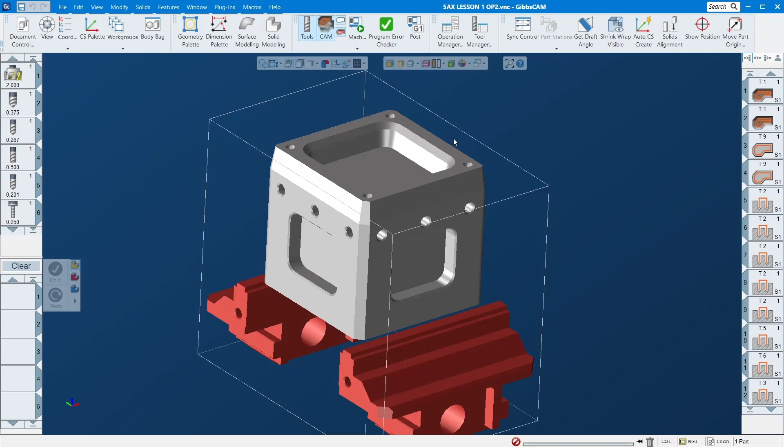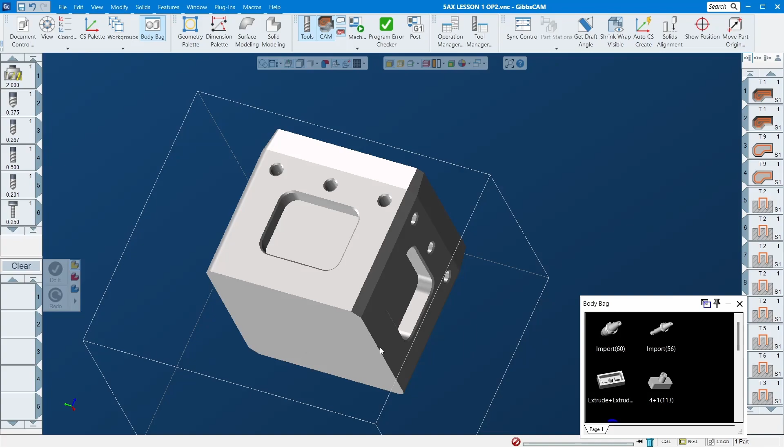I will show you how to align the model with the fixture with the vise so you can see how it's done. This is kind of tall for this vise, but I think it will be fine because it's just a three axis. The bottom doesn't really have anything here, so all we do is align it to the vise, then cut off whatever material we have left, and then chamfer it, and that should be done for this part.

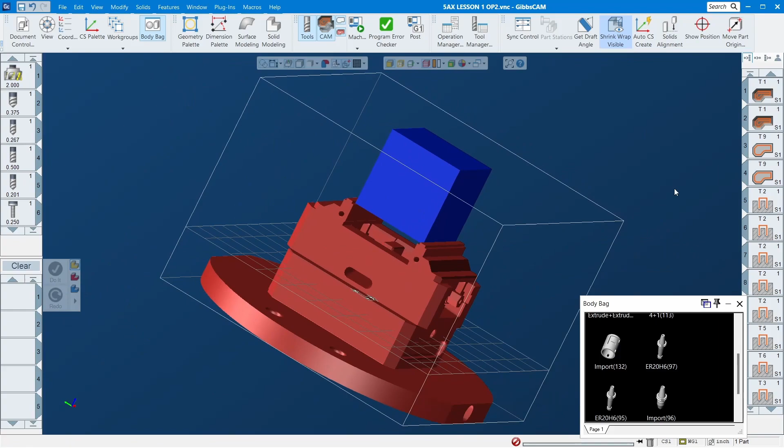So let's see here, take out the vise. Okay, let me turn this one to part. Okay, that's the vise, that's the stock, right? So everything here is from the first op.

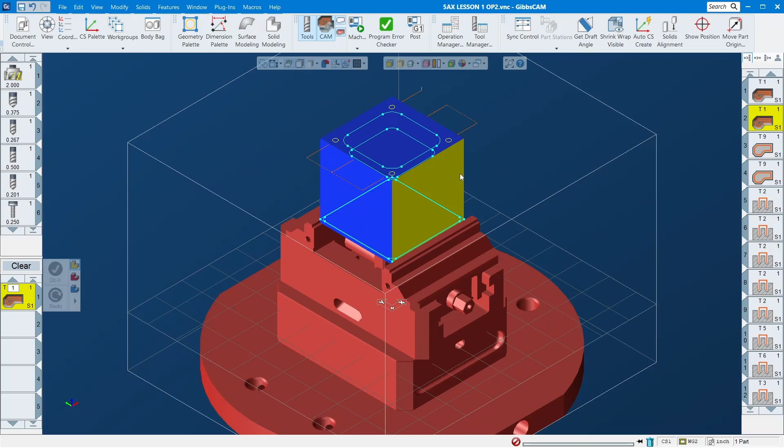Let me check and see how much we did last time. We removed material last time, so 90 thou, right? We know this is 4 by 4 by 4. And the part, how deep is the part? Okay, so 3.74, I think that's what I got. So 4 inches, we remove 90 thou already, and the part is 3.74, so about 250, and we remove 90, so what we have left is 0.16.

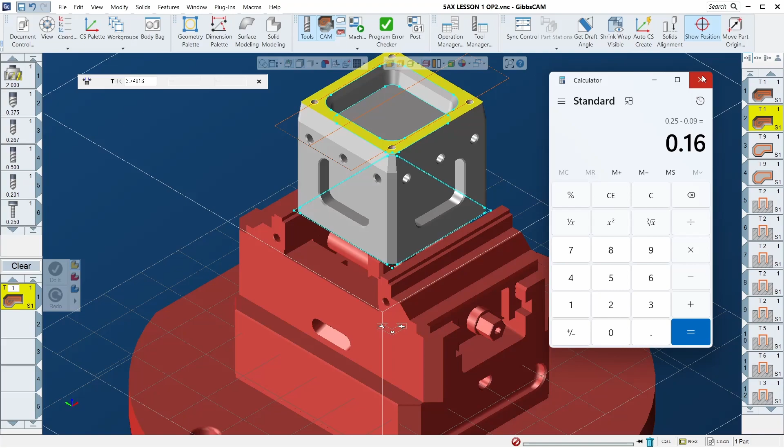Okay, since this one will be just a three axis, I'm going to delete all toolpaths here, and then we can redo all of these. Also, I want to clean up my program, so usually I delete all of this work group and CS.

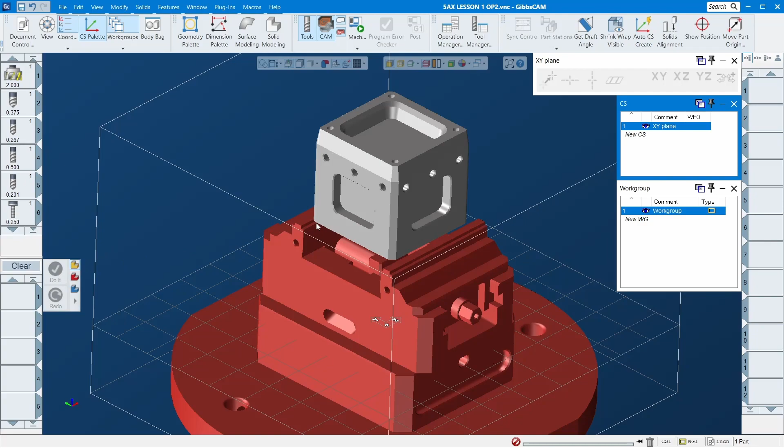Okay, I have to delete one. Okay, just like that, because all we do is just three axis, we just need to align this model upside down, so it's facing the bottom up. So that's where it should be.

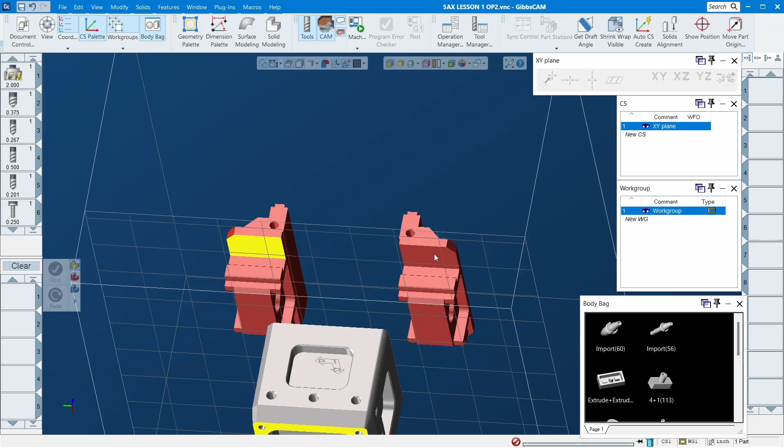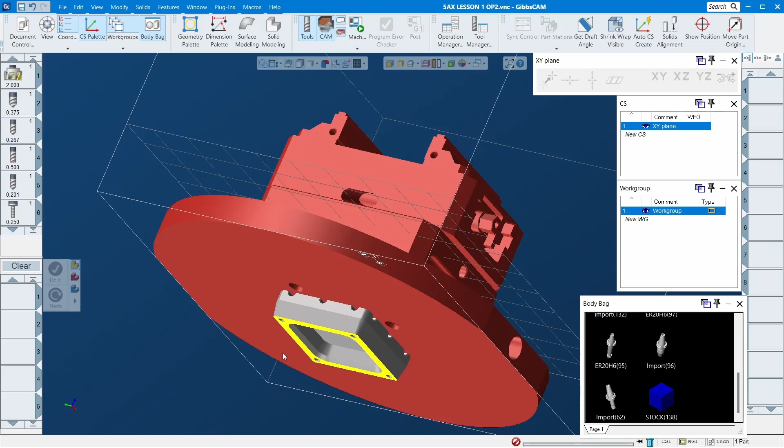Alright, since you have this one set up like this, all you need to do is highlight that surface, align to CS, and then align this to the vise. This is the vise, I'll show you. So, okay, this one's better. You want to line up your part face with this, right? So all you need to do is click the bottom face, highlight the bottom face, control and highlight that face, and then Solids Alignment.

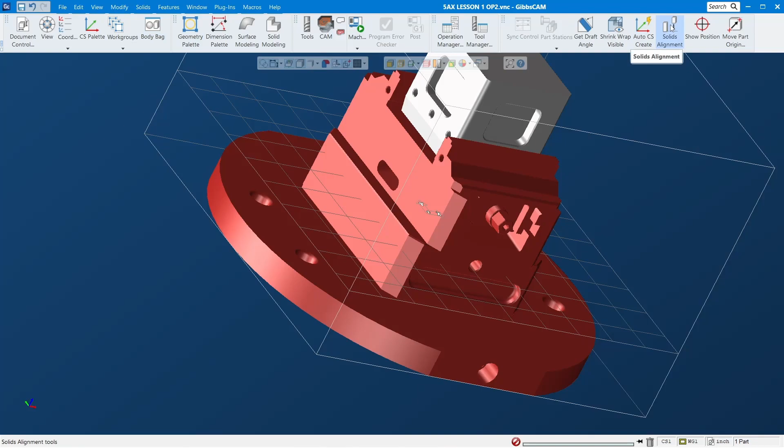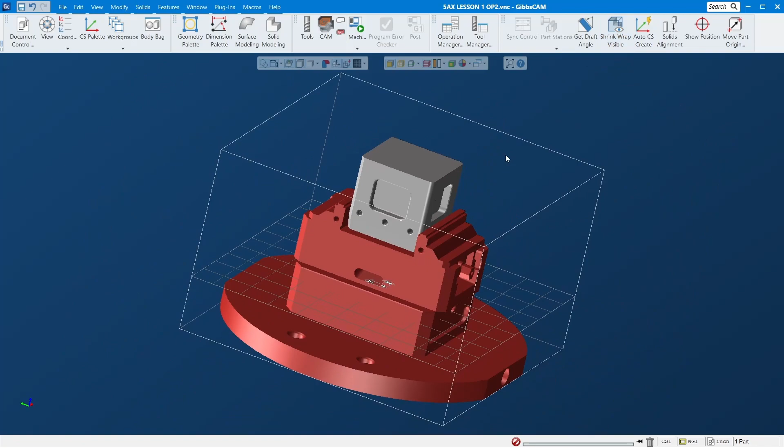That's it, so we don't need this stock anymore. Okay, and clean those up. As you can see, it will sit like this. Okay, so it's going to go in here a little bit, so we're going to fix it by aligning it again. That, and this. There you go.

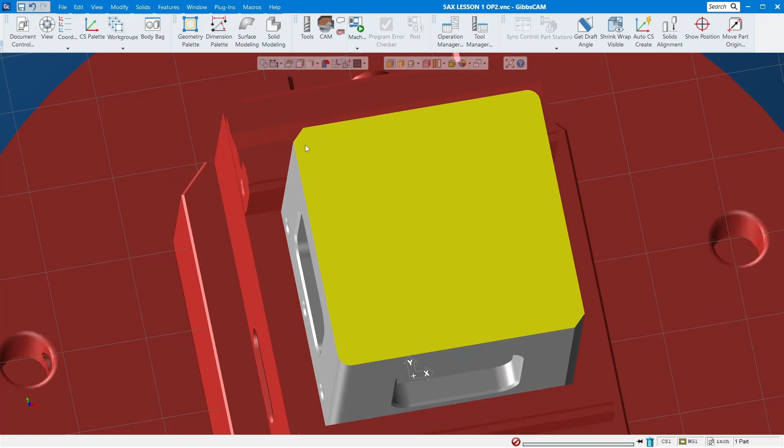So now it will stay with whatever you want, right? Just make sure that when you put it in the vise, since this one has a radius and this one a chamfer, make sure you align it correctly, otherwise it will mess this one up. So pay attention to that. Next one is just extract the geometry, right, and ready to make the program.

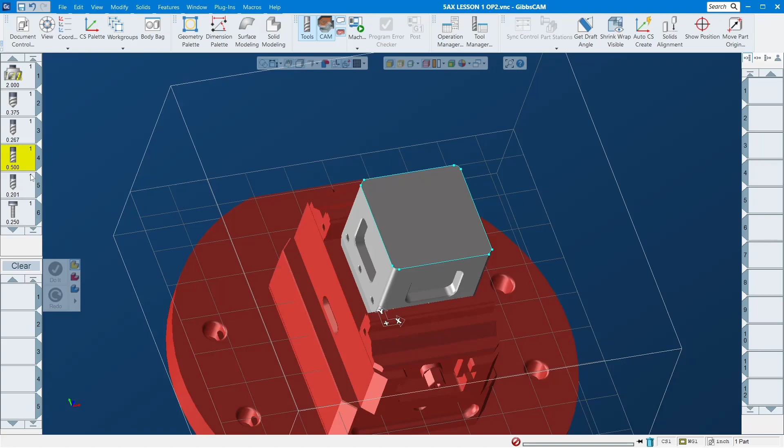So we can use a half inch here. As you can see, when you flip this one over, the material will be sticking out around here a little bit, about 160, right?

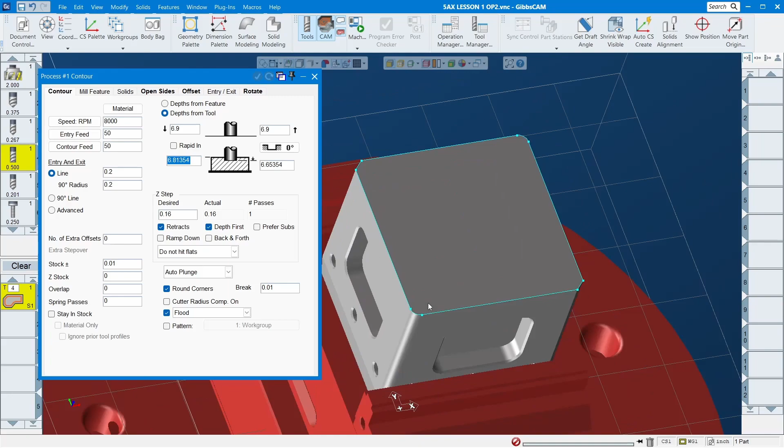Okay, so 160. So what I usually do before I face up is just do a contour pass to cut the stock out here, so when you face, it doesn't make chatter sound. Or sometimes when you have a big material hanging out too much, I think it's a good idea to just clean up around it before you face the side. That's what I do, so it depends on what you want to do. Sometimes it's not necessary, but sometimes it does make sense to cut around it, and that's usually what I do.

Now you have this number, which is 6.9. Yeah, I think it's good. Now go to the 0. Oh, I just want one.

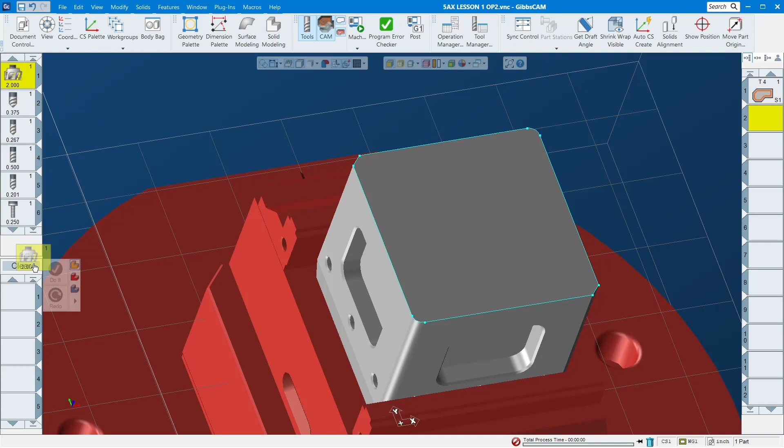And now move the face down. Face mill, I think we do 70. Okay, leave some for finish. Everything else should stay the same. We don't want all the way down, so I don't know, 60 thou, something like that.

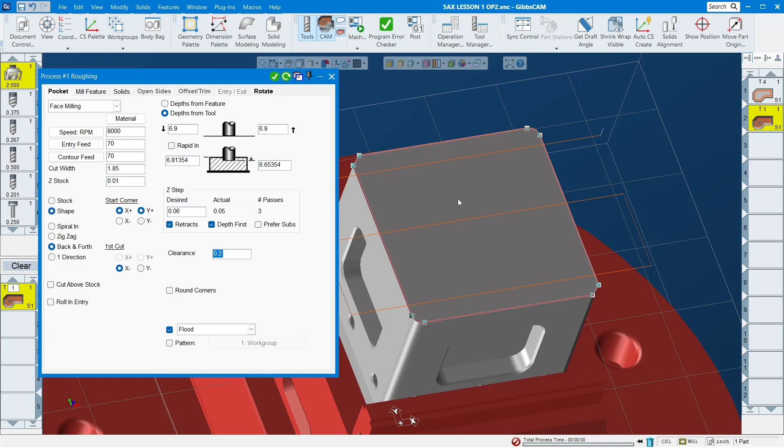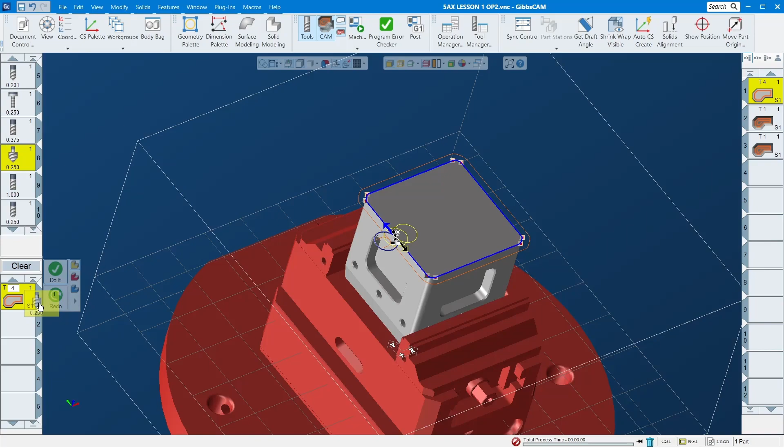Okay, so check this actually. There you go. And then the next one, the finish pass, you can check that. Of course, this is one pass for finish, right? And this one will be the chamfer, because we want to do a chamfer around, so it looks nice.

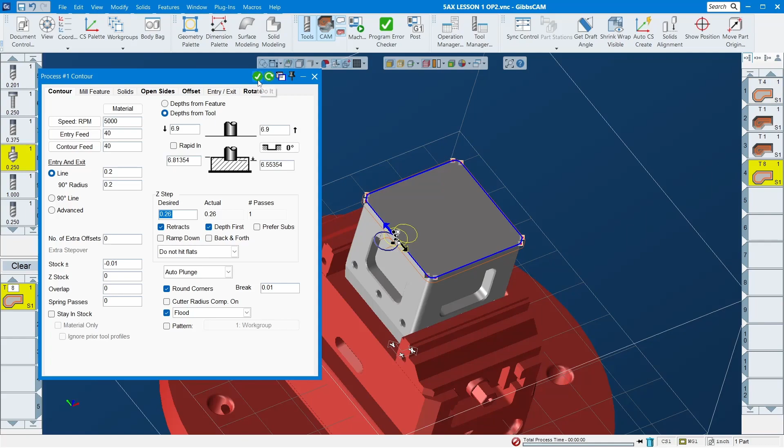Chamfer, maybe slow it down a little bit. -10. And about 0.1 down. Do it. Okay, so we need to turn this to stock to display so we can see it.

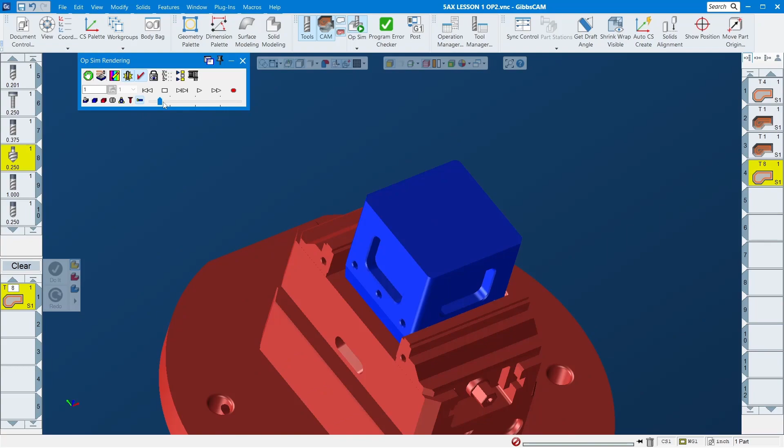Now we don't need the machine sim anymore because it's just 3 axis, everything should be clear. Alright, so let's do slow so you can see. Let's cut out the face mill.

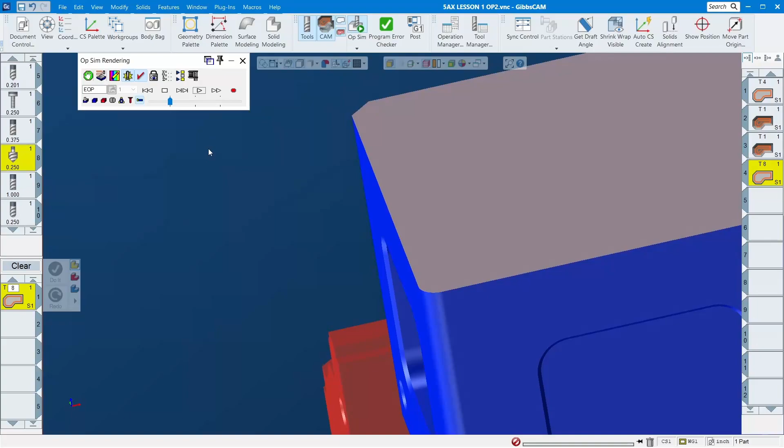I don't see the face mill button. Why is that? The chamfer doesn't cut, so kind of weird.

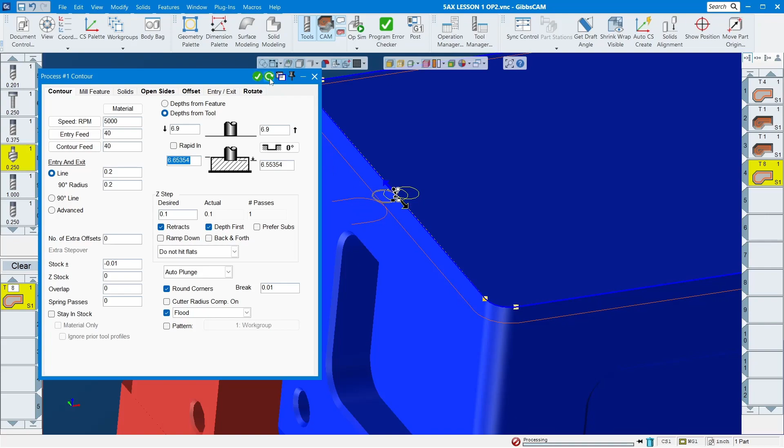-10. Yeah, should be. Oh, okay. This one should be down there because you already cut to the side, right?

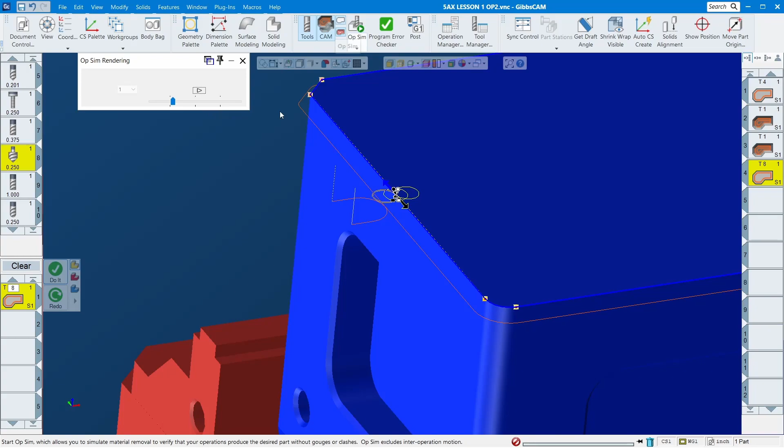Which is the number previously I have 6.8 something. That's where the top of the stock is, so that's why it doesn't cut. But this time it should cut. You should be able to see the chamfer pass now.

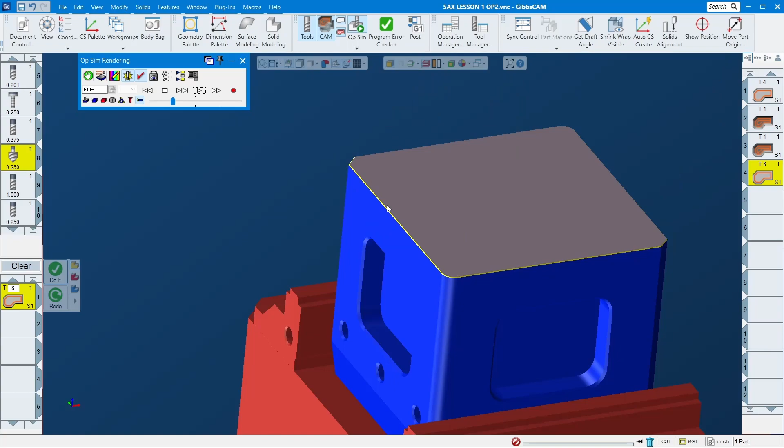There you go. That's it. Well, also another note I want to make here is when you make a long or complicated program, make sure you save it frequently.

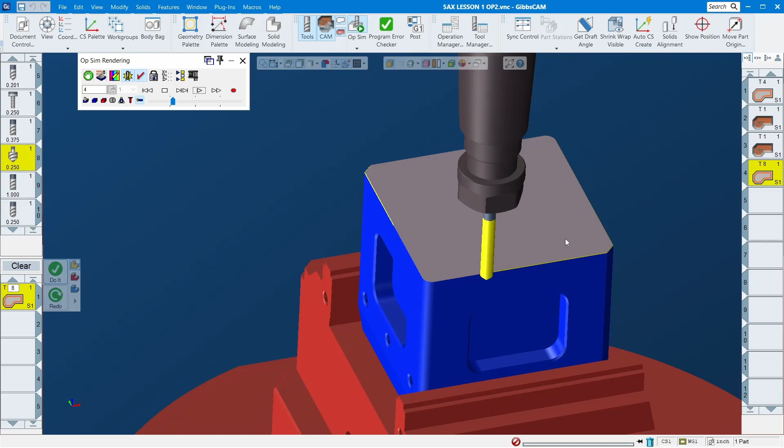So in case it crashes, or somehow you don't lose the previous step that you already made. And the second one, when I talk about making sure the value lines up, like for this part, if you don't line it up correctly, then what happens? Let's see for this part if I rotate it like this. Okay, I think it matters.

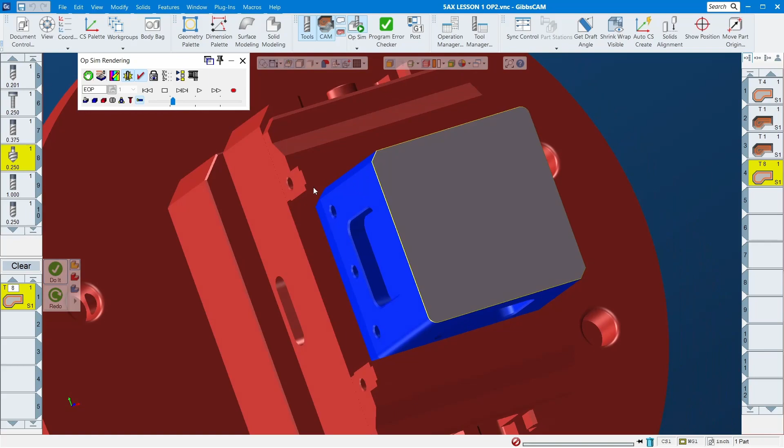So make sure when you put it in, whatever you set up in the CAM, it's exactly the same as how you put in the value on your machine. This chamfer and this radius look like this. And then when you put it on the machine, make sure you do the same. But I think you should have known that already, right?

But just another note I want to make so you don't mess it up, because I've seen people just put it in, they don't even look at anything, then they program it in the opposite way and they mess up the whole thing. So you have to redo the whole part. Something like that is not fun to redo again.